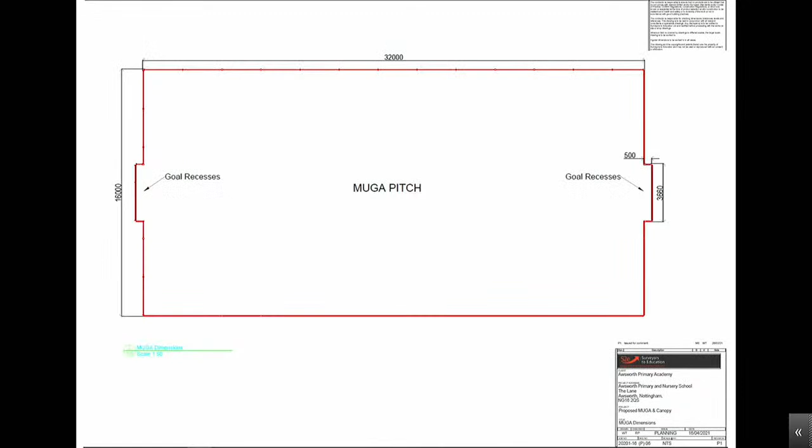As the gentleman just said, there is an issue with flooding in the area where they're proposing to put this pitch. Surely, if we know that's there, what we should be doing is suggesting it be built where there's no danger of flooding.

I don't need to say any more than that, apart from the fact that I, Councillor McGrath in his county council position, and Councillor Ball in her Broxtowe position, were all at the meeting last night with Awsworth Parish Council. It was them that brought the subject up, and it was that parish council that unanimously last night asked for it to be put where they asked for it in July, on the right hand side of the drawing as we're looking at it. That's about all I've got to say, really. Thank you very much.

Any other comments, questions? Councillor Philip Owen. Yeah, thank you, Chairman. I have to say I do find the resubmission of the application without any changes or apparent consideration for what the Planning Committee said last time something of an affront to us all. I'm particularly disappointed.

There's no question that MUGAs do generate noise, it's the nature of the beast. I recall some years ago this council took out a noise abatement order against a MUGA in Greasley. Some of you will remember that, and that order is still in place. Going back even further, we had a MUGA to the rear of Horsendale Primary School, operated at the time by Nuthall Parish Council, and it was a constant source of complaints from residents who lived adjacent to it.

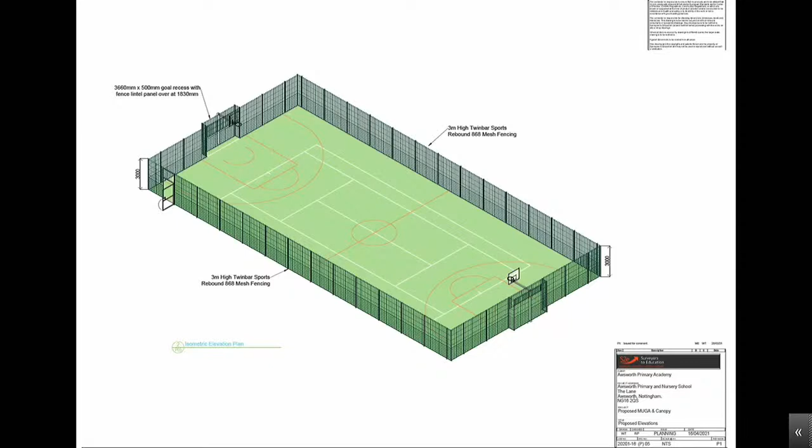The MUGA will be surrounded by a security fence which, looking at other MUGAs, is at least 8 feet, 10 feet high — 3 meters. Well, I don't deal in meters, they're for gas and electricity. In other words, you're talking about 12 to 13 feet high. So you've got a security fence 12 to 13 feet high.

Are we seriously suggesting it's going to be any more difficult for anybody who wants to get in to clamber up that 13-foot security fencing where it's proposed according to this application, than it is by the roadside? That is utter nonsense. There's no question to my mind that it is utter nonsense to suggest that.

What I suspect they want is that if people are going to get into it, they want the houses around to act as local policemen. Well, that's not their job. Now, I don't think the school are playing fair. They can have their cake and the residents can eat it.

They can have the MUGA and the residents don't need to be disturbed, because the positioning of the MUGA can be at the roadside. So I will not vote for this application in its current form.

If the applicant comes back and says, well, we've listened to what you, planning committee, and you residents have said, because academy schools are charged with working together with the local community. Quite a few of them seem to forget that nowadays, but they are supposed to be an integrated part of the community. This doesn't seem to me to be good community relations. So, Chairman, I will vote against this on the basis that they have not listened to the local community, they have not listened to this committee.

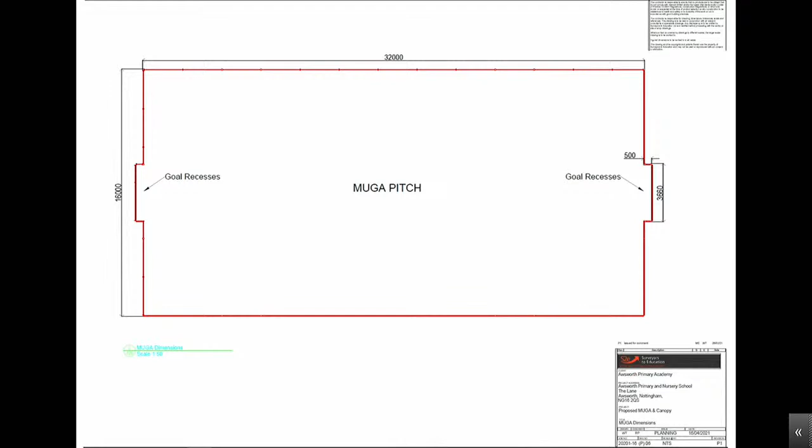I'll deal with the flooding first. That's quite straightforward. They've said that the site will drain naturally, in terms of even though it's got flooding, surface water will go through it into the grass. That shouldn't affect the flooding in any way at all.

With regards to moving it, we asked them. They either heard the committee or saw it last time if they wished to move it, and they've come back. This is their answer, saying they don't want to move for the grounds we've raised in the report.

So my suggestion would be to committee members that if they're happy, go with the recommendation. If they're unhappy, go against the recommendation, because we've gone back to them already to say members would prefer it to be located here. Committee raised concerns about flooding and concerns about its location. They've come back and addressed the flooding issues, and come back and said they don't want to put it near the road for the reasons outlined in the report. They want to leave it where it is.

So in my view, I won't lead anyone. We've already said to them this is what we think as a committee. They're aware of that and they've come back in its current form. So I think we vote on it one way or the other based on that. Thank you, Chair. Councillor Grindell, yeah, I'd like to find out, Chair, legally where we stand on this.

Well, if you don't like it, vote no. There's no legal comeback on this. We've already told the applicants what the concerns were, and they've chosen not to address them. So what you have to decide is whether or not the failure to address it is something that would make you vote no. If it is, you vote no. If you're happy with it, you vote for.

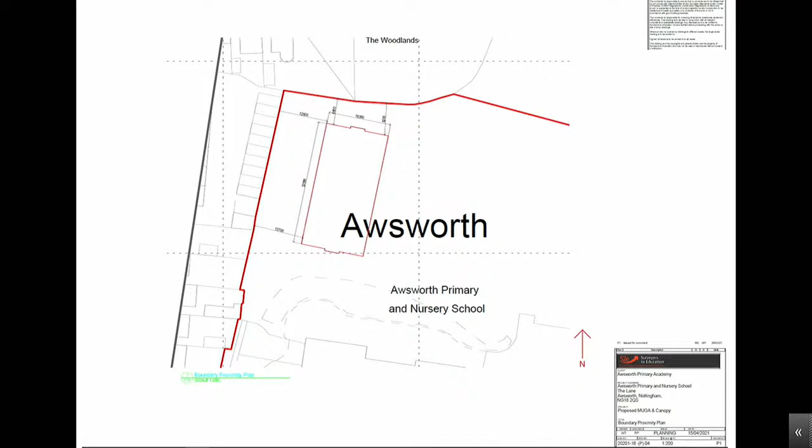What we just want is for it to be in a way where it won't affect residents, because the residents, when it's close to the road, are across the other side of the road, so they've got traffic noise anyway. But that particular area, it was described to me by one of the residents as a bit like an arena, because as well as houses, you've got a little shopping precinct with balconies on it. So the noise, even when children are just playing normally in the playground, comes into that area and magnifies ordinary children playing in the school. So what's going to happen, all right, they do limit noise, but there's still going to be noise coming across during the day, and all the people living there are going to be affected by it.

The other thing is, in their application, the applicant says they're protected by large hedgerows. Well, in actual fact, on the site, when we visited, there are no large hedgerows where they want to put it, but where they actually don't want to put it, there's a big hedgerow on two sides. So to me, we don't want the children not to have it, but as our leader said on the night in July, it's the right thing in the wrong place. Those were the words he used that night, and I think they haven't changed it, and I personally am not going to change my mind.

Okay, thank you very much. Anybody else? No. If not, it has been moved and seconded, so can I see those in favour of granting planning permission, please? 2, 3, 4, 5. And those against? 2, 3, 4, 5, 6, and I abstain. So that is refused.

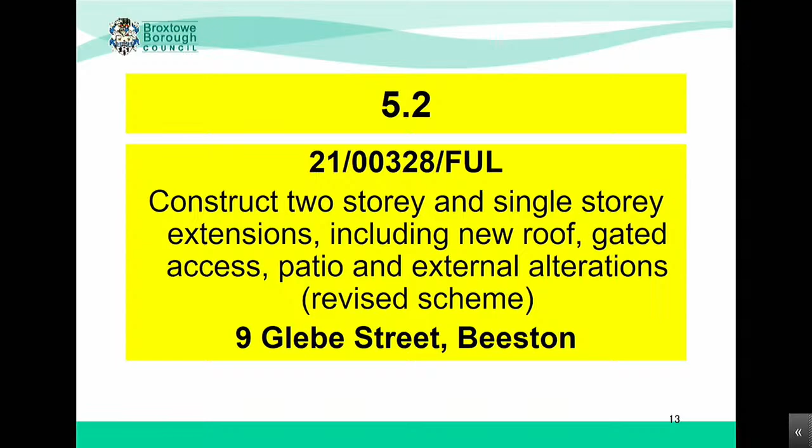Thank you, Chair. First off, late items: we have an email received on 29th of September commenting on the content of the committee report, in respect of the overuse of the word compromise in the report, being unaware of other sites considered for the garage, emphasis on the conservation advisor's comments which are considered to be wrong, and that the application should be assessed on preservation and enhancement and not on engineering constraints. Everything else is covered in the report.

Members may recall the dwelling that was granted permission on this site following the committee meeting in July. Some of the plans and elevations in the submitted documents show this dwelling for completeness. This application seeks 2-storey and single-storey extensions, and is a revised scheme from a previously approved scheme in April 2020, so quite a lot of planning weight is attached to it being a revised scheme. The main changes are outlined on page 32 and the images on page 33 in the report, which go into quite a lot of detail.

The main increase is the ridge height of the roof to 7.8 metres, which is half a metre increase on the previous, and an increase in the dormers from 2 to 3. The existing Elm Avenue elevation will have a vaulted ceiling porch, which remains with the slight increase in roof height. There's a contemporary 2-storey side and rear extension proposed, with an integral garage and gated access off Elm Avenue. We think it's a very large plot and we're content the site can accommodate these changes.

There's some limited impact on amenity, which we consider to be very minor, and the appearance of the building will be altered. We are happy with the application and recommend approval.

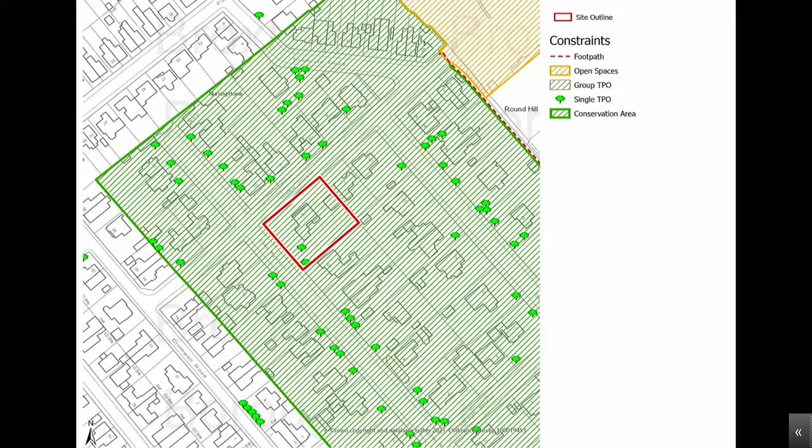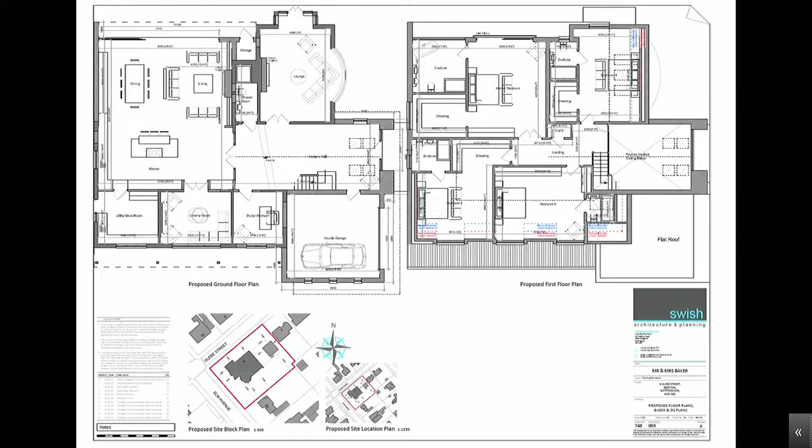In addition, only in July 2019, a senior Broxtowe planning officer, Catherine Lowe, rejected the very first plans from the applicant for the primary dwelling. She argued that the property makes a positive contribution to the conservation area designation and is a locally listed building of interest. Proposals that significantly impact a heritage asset need to provide clear justification for how the merits of the proposal outweigh the harm arising from the proposal.

Due to the significance of the alterations and their contemporary appearance, the development as it currently stands would result in a complete loss of heritage asset, and therefore the harm caused does not outweigh the benefits of the scheme. A proposal which has more elements of an arts and crafts style building and retains as much of the original building as possible could be considered more acceptable.

A reminder that this was only 2 years ago, and whilst we have endured a pandemic since then, the planning principles within the conservation area outlined by Ms. Lowe remain valid today. Permission was subsequently granted for extensions and alterations which made substantive changes to the scale, appearance and arts and crafts character of the building.

However, within that scheme, elements of the original building were clearly discernible: the wall facing Glebe Street, some semblance of the scale of the existing roof when viewed from Glebe Street. The side wing is also set back from Glebe, which promotes the original wall of the dwelling as the most prominent element. This was not a perfect outcome, but evidence that we can blend the needs of all stakeholders in the planning process. Where there is a will, there is a way.

The current proposal now seeks to further enlarge the approved dwelling without any regard to its arts and crafts heritage. On Glebe, the roof over the original section would be significantly larger and would now incorporate 3 dormers rather than the approved 2. The side wing is also larger, and a double garage is now added to the corner of the building. The garage need is purely because we have approved an infill development at the site of the current garage. The new scheme also introduces a flat roof element on 2 prominent elevations.

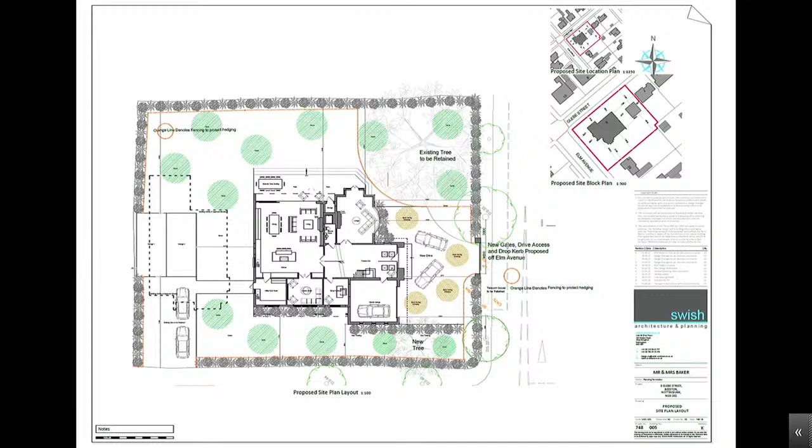Finally, I do feel the presentation of the plans is disingenuous. There is no attempt in the plans to show the impact of the revised design for the primary dwelling in conjunction with the approved infill. I believe it is clear that the combination of the 2 dwellings will overwhelm the site, remove the open and spacious character of the existing plot, and have a negative impact on the conservation area.

I urge the committee to reject this application and comply with planning practice guidance to conserve and enhance the historic environment of the conservation area for future generations. Thank you.

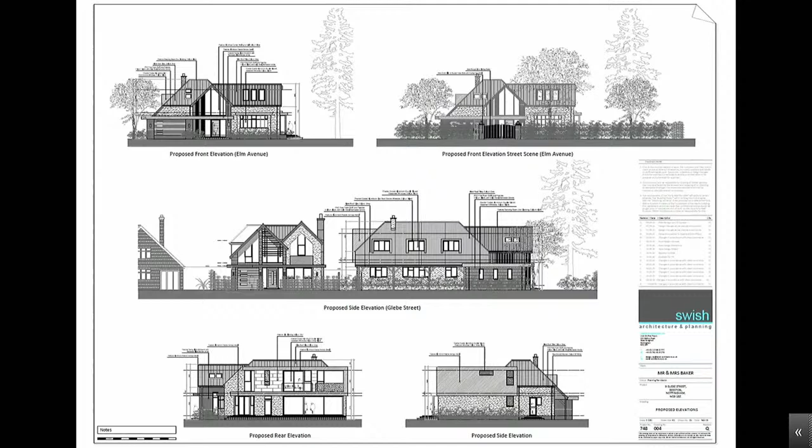Right, so we move on to item 5.3: construct a dwelling on land adjacent to 3 Edinburgh Row in Kimberley, on pages 51 to 60 of the agenda. Mr Dawson, would you like to introduce this?

Thank you, Chair. Planning for constructing a dwelling - this time around it's smaller. Planning permission was refused in 2020 under a previous reference of 4884 on grounds of loss of amenity to neighbouring properties. This scheme has come in for a smaller property with a lower overall eaves, roof height, and a smaller footprint.

The issue on the site, if any, is that it is set at a slightly high level, approximately 2 metres above the rear gardens of the existing properties 3 to 9 Edinburgh Row. However, this will only be faced by the side elevation of the proposed dwelling and an opaquely glazed bathroom window. So essentially, whilst there are level differences here, due to the lack of overlooking and the small scale nature of the development, we're happy that no detrimental issues in amenity terms occur. We're happy with the design and there are no access or highways issues here. It's a brownfield site suitable in our view for approval for one dwelling, therefore we recommend approval.

Thank you, Chair. Thank you very much.

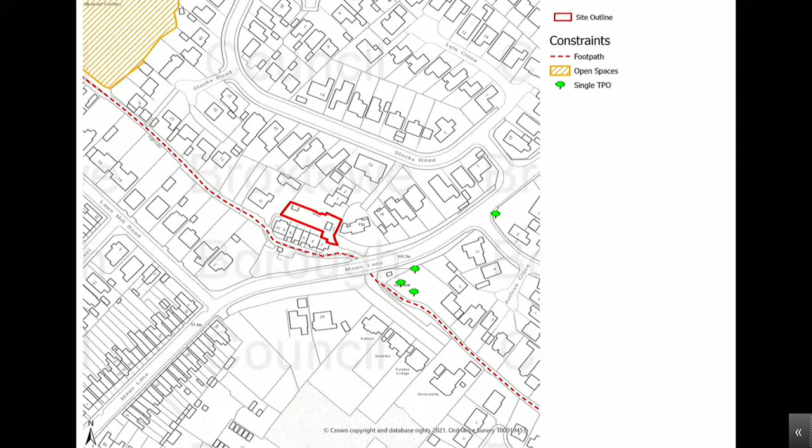Thank you very much. Anybody else wish to speak? Councillor Philip Owen - yeah, first of all, Chairman, may I ask a question of Mr Dawson?

Looking at the report, I can't see any reference to any objections being listed. Have there been objections, and if so, why aren't they listed, or have I missed them? You're certainly right that there aren't any listed. Yeah, I've got two here. Page 54. Oh, I beg your pardon, yes - paragraph 5.1.

Yeah, 5. Oh, I'd missed that because it was under Nottinghamshire County Council Highways. I'd just seen no objections, which is quite interesting. We know that they don't make objections usually, but one property isn't going to make a deal of difference to that particular stretch of road, which is a fairly busy stretch, but residents advise me there are so many potholes at the moment they can't do any speed anyway. That might change when I get it resurfaced, but time will tell on that.

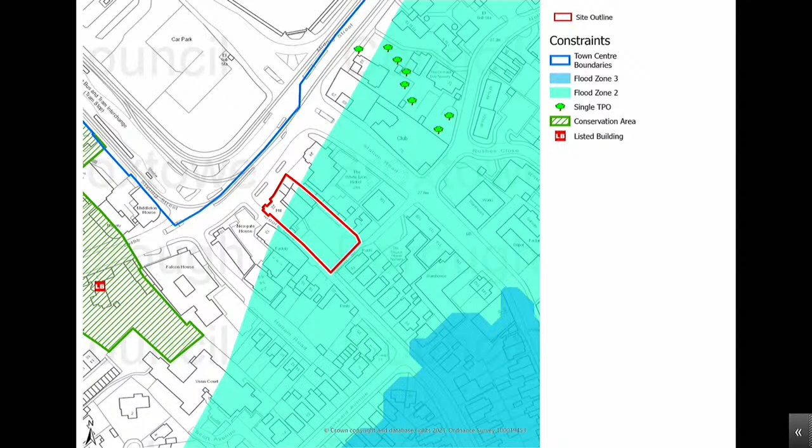Yeah, I tend to disagree. I think we got this right previously with 9 o'clock. It is a residential area, edge of town centre, and describing that as a more substantial part of a marquee - it's still a marquee. It's still completely porous.

There's no soundproofing qualities to that marquee. It's quite a substantial building. There's an upstairs function room in this bottom left-hand corner above that kind of old barn or stable. There are plenty of parts within the brick-built solid structure, which is a lot more soundproof, that could have live music or recorded music late into the night if they wanted to.

The bit that's edged in red is a marquee. It's fabric walls, and I just don't think it's appropriate that we have amplified music in that beyond 9 o'clock at night. I think that was the right decision a year ago, and I stand by it.

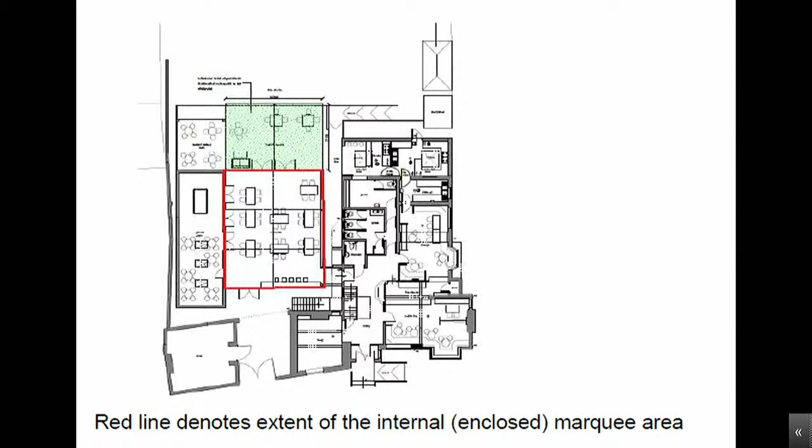Okay, that takes us on to item 5.5, and this is land at Blake Road in Stapleford. You'll recall we had an application at the last meeting for the retention of some gates at the farm here. This is on the same site, and so I took the view that I didn't want this just to be nodded through without the committee looking at it, seeing as we'd overturned the recommendation of the officers on the last occasion, hence it's come to the committee. But it's an application to remove the existing mast and replace it with a higher mast, I think an extra 3 metres being added on with 12 antenna at the top.

So Mr Dawson, would you like to introduce this? Yeah, you've largely said pretty much all I was going to say, to be fair. It's all good. The replacement mast goes from 22 metres to 25 metres, so an additional 3 metres. All replacement equipment is on the same footprint as the existing antennae. The principle was established as the antenna already there. It is located in the Greenbelt. We do not believe the overall difference is significant. It's required for 5G modernisation in terms of improving 5G coverage in that area. I think it needs permission because under telecommunications PD, if you go over 15 metres, you need full planning permission as opposed to usual PD, although I'm happy to be corrected on that. We tried to find it out earlier and couldn't look into it in detail. Either way, it needs planning application. We recommend approval here. Quite happy with it. Thank you, Chair. Thank you.

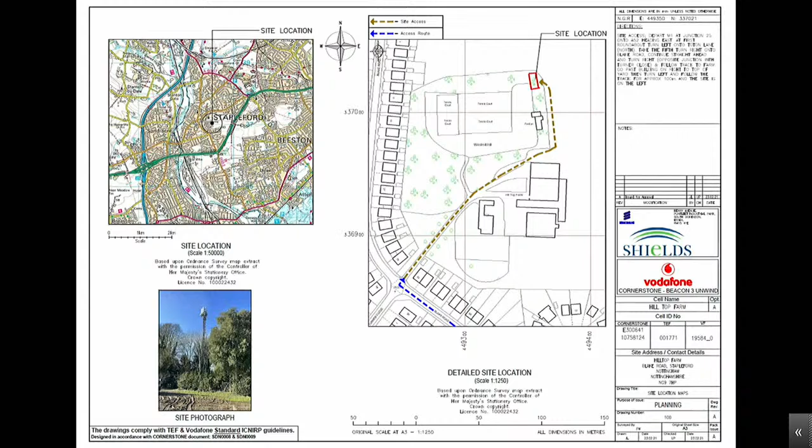Okay, there's no public speakers on this. I shall move the recommendation to grant planning permission. I second that, Chair. Thank you.

Any comments, questions or observations? Councillor Grindell, it's your ward. Thank you, Chair. I remember when the planning application came in for the existing one - we got a lot of complaints from neighbours, emails, letters, phone calls. But this particular site is probably the best ideal place to actually place the extra 3 metres on. It's well protected by greenery and trees. It wasn't very good at one time, but they've grown up since. I've not had one complaint, one email, one phone call this time moaning about it. It's the committee's mind to put the extra 3 metres up - I won't be doing it myself. So I see no problem with this at all, Chair.

Thank you very much. Councillor Jackson. That's exactly what I was going to say. I won't waste everyone's time.

Okay, go on - we've got to stretch this out for another 20 minutes because I'm in a bet with Mr Dawson over what time we're going to finish.

Okay, thank you. Anybody else? No worries.

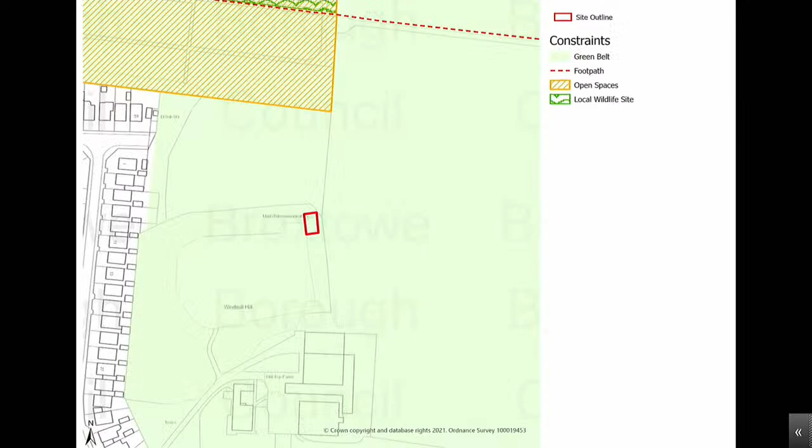I'm Councillor Wilmot. We've had 3 of these in our area, and they are becoming more frequent because of the upgrade of the system to 5G. If you want 5G, you've got to accept some changes. Two of them went through without any controversy whatsoever. One had some controversy from neighbours, but they've accepted it and it's finished now. Now we've got another one in the pipeline at the moment. So I see absolutely no difference between what we've had and what is being proposed here. This is remote from any houses, surrounded by woodland. Looks like a perfect solution to me, and I can't see any reason to vote against it.

Thank you very much. Anybody else? No, in which case it's been moved and seconded. Can I see all those in favour, please? And that is unanimous. Thank you very much.

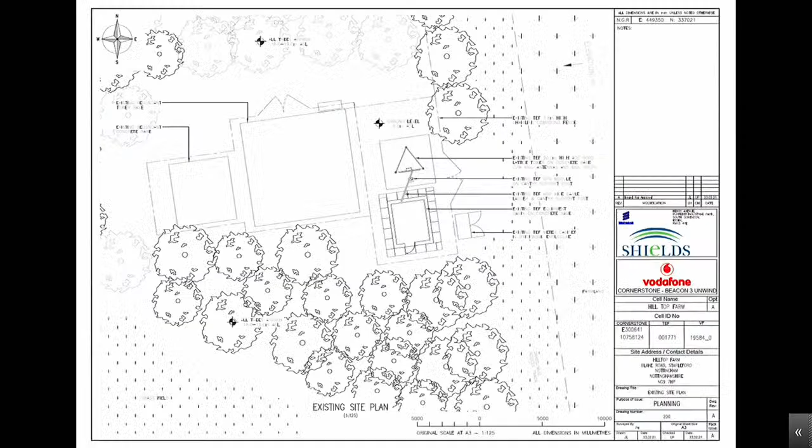Okay, we'll move on then to the delegated decisions. I'll take these page by page, so if you want to raise anything, just please shout out at the appropriate point. Page 86, 87,

88. I'm just going to mention the first one in Bramcote, the doggy daycare facility. The file was closed because they would never validate the application, and I know the planning department put a huge amount of effort into getting them to do the right thing and submit the right forms, but for some reason they wouldn't. So it just seemed very odd to me. But there you go - they've chosen to waste everyone's time like that.

Okay, page 89, 90, and 91. Councillor McGrath.

I was told by some of the lads that work down there, who've worked there for years, that it's between 40 and 50 car carriers coming out there a day. Well, that concerns me straight away, because the only way out is left up to the motorway. Whether that road can carry 50 car carriers a day isn't up to me, because I don't believe that bridge going over the Erewash could handle it. But then if there's an accident, that means they'll turn right into Stapleford.